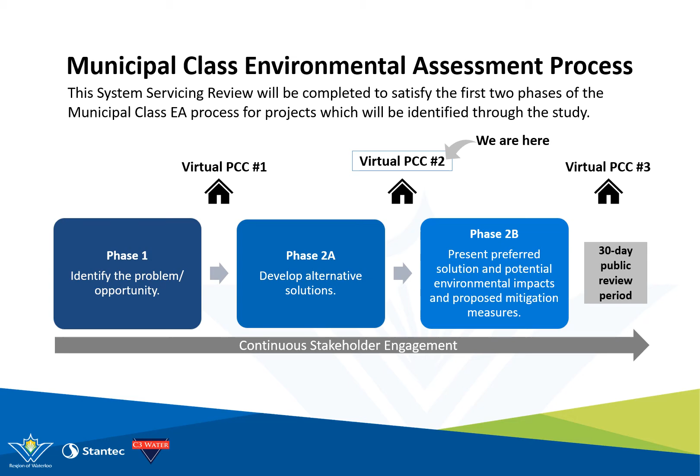We are currently in Phase 2A of the study. Following the confirmation of the preferred solution, after the 3rd Public Consultation Center, and the presentation of potential environmental impacts and proposed mitigation measures, a project file report will be prepared to summarize the decision-making process for the public and stakeholders. A 30-day review period will be provided for the public and stakeholders to review and comment on the report.

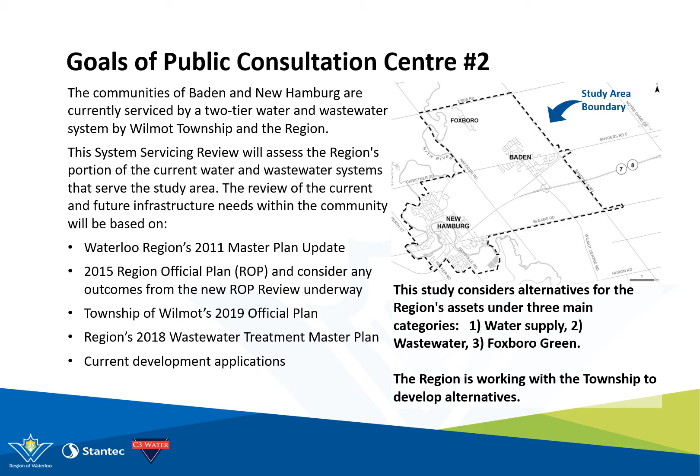The review of the current and future infrastructure needs within the community will be based on the following: the region's 2011 Master Plan Update, the 2015 Regional Official Plan, and considerations for any outcomes from the new Official Plan review currently underway, the Township of Wilmot's 2019 Official Plan, the recommendations from the region's 2018 Wastewater Treatment Master Plan, and current development applications. This study considers alternatives for the region's assets under three main categories: 1. Water supply, 2. Wastewater, and 3. Foxboro Green. The region is working with the township to develop alternatives.

Water storage is sufficient for existing conditions, but under future conditions, additional storage is required of approximately 4,000 cubic meters. As for the community of Foxboro Green, it is currently supplied by a water treatment plant. However, the plant's assets are aging, which demonstrates high operation and maintenance costs.

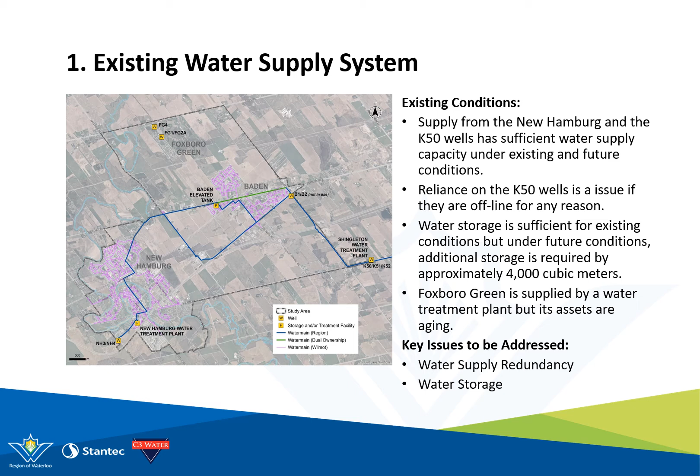Taking these existing conditions into consideration, the intent of this EA with regard to water supply is to address the following key issues: water supply redundancy and water storage. The following alternative solutions have been developed to address the key issues identified for water supply. With regard to water supply redundancy, there are two identified alternatives. Alternative 1, do nothing, and Alternative 2, actuated valve at Shingleton, which allows water to reverse flow under emergency conditions. This alternative is being examined under another study.

With regard to future water storage, there are 5 identified alternatives. Alternative 1, do nothing. Alternative 2, provide increased storage at the New Hamburg water treatment plant. Alternative 3, provide new storage at the Baden well site. Alternative 4, provide new storage at the Shingleton K50 well site. And Alternative 5 is a combination of any of the above.

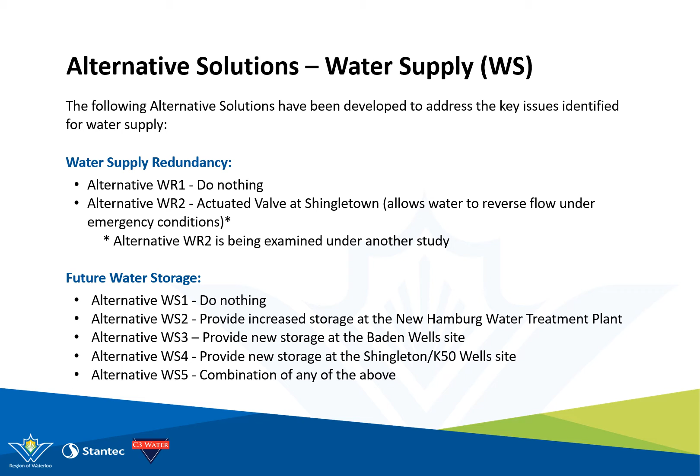The first alternative water storage solution involves doing nothing. This alternative does not include any upgrades and would not meet the overall intent of the study, but is used for comparison purposes.

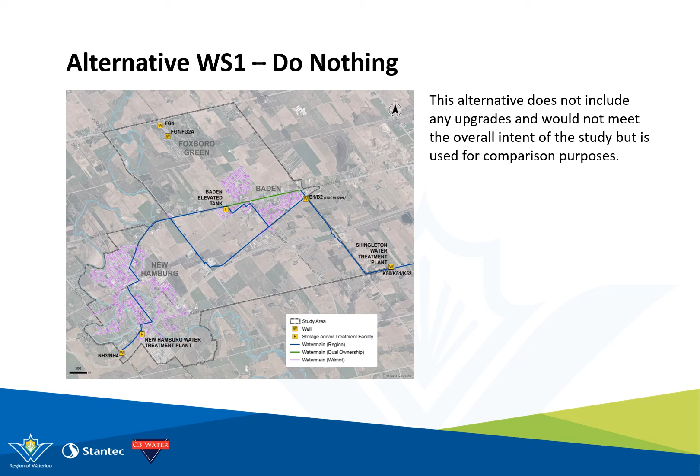The second alternative water storage solution involves increasing the existing underground concrete storage at the New Hamburg water treatment plant. Considerations for this solution are as follows. This increase in storage would help to accommodate future demand peaks. This solution would, however, require increased flow from Baden to allow refill of the New Hamburg water treatment plant reservoir during high demand periods. There are possible site and land limitations related to this solution.

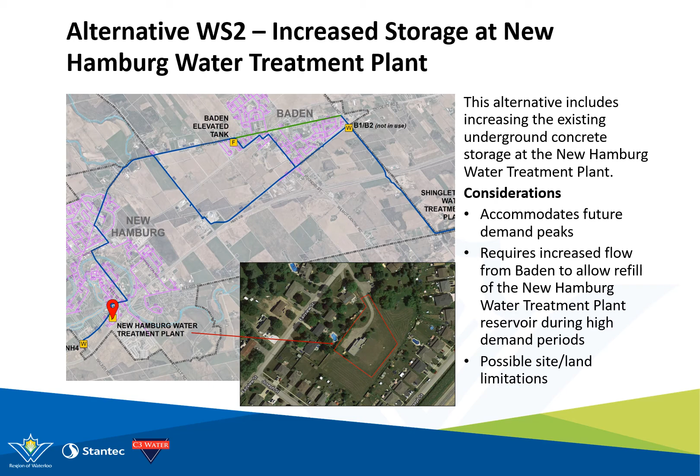The third alternative water storage solution includes creating a new underground concrete reservoir and pump station at the former Baden well site to be fed by the K50 wells. Considerations for this solution are as follows. This option presents an opportunity to reuse the Baden well property. This solution also provides ability to supplement water supply from the Baden elevated tank during periods of high demand. This solution would, however, require repumping of water with a new pumping station and would not be energy efficient. There are also possible land and site limitations related to this solution.

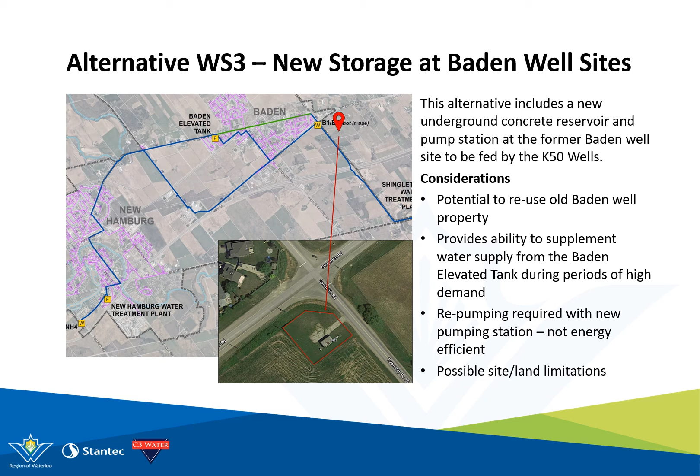The fourth alternative water storage solution includes a new underground concrete reservoir at the Shingleton K50 well site. Considerations for this solution are as follows. This solution would supplement the Baden elevated tank during periods of high demand and allows for possible alignment with future manganese treatment and storage requirements. A new pumping station would be required as part of this solution. There are possible site and land limitations related to this solution, and additional area is required to accommodate the new underground concrete reservoir. This solution does, however, provide potential for linkage with the Mannheim well supply.

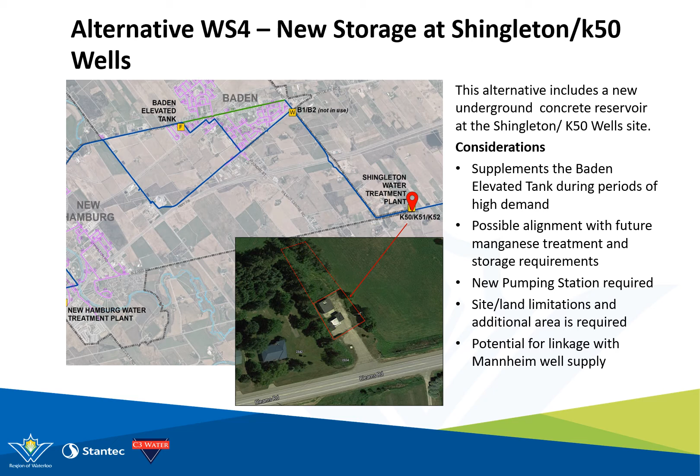The following map provides an overview of the existing wastewater system that serves the communities of Baden, New Hamburg, and Foxboro Green. The region's wastewater infrastructure is shown in blue, purple, and yellow. Existing conditions of the wastewater supply system are as follows. The New Hamburg Wastewater Treatment Plant has sufficient capacity for the study area. The Morningside Pumping Station is also sufficient for existing conditions. As for the Baden Pumping Station and associated force mains, these assets are under capacity for future growth demands within the study area. The Foxboro Wastewater Treatment Plant has sufficient capacity, but requires optimization.

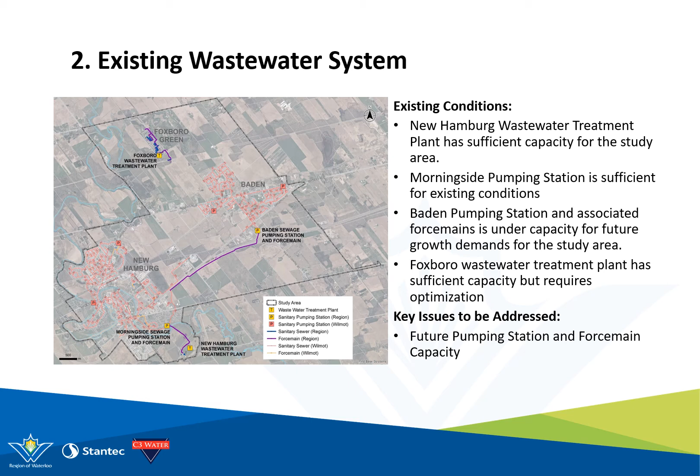Taking these existing conditions into consideration, the intent of this EA is to address the following key issues: future pumping station and force main capacity. The following alternative solutions have been developed to address the key issues identified for wastewater collection. Regarding future pumping station and force main capacity solutions, 4 alternatives have been identified. Alternative 1, do nothing. Alternative 2, upgrade system and maintain existing configuration. Alternative 3, upgrade system and convey directly to the Morningside pump station. Alternative 4, upgrade system and convey directly to the New Hamburg Wastewater Treatment Plant.

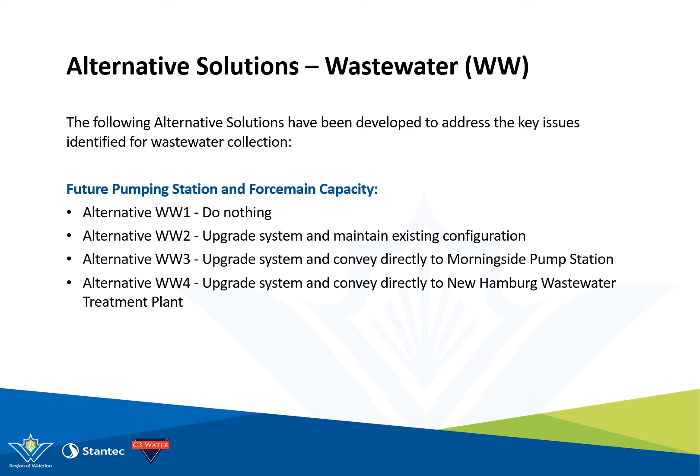The first alternative wastewater solution involves doing nothing. This alternative does not include any upgrades and would not meet the overall intent of the study, but is used for comparison purposes.

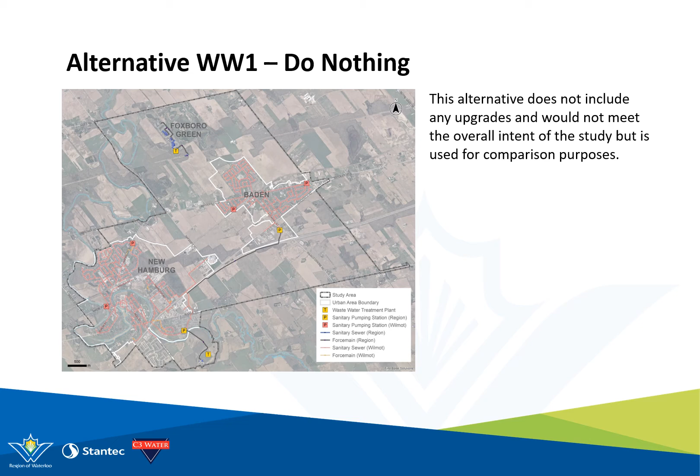The second alternative wastewater solution involves upgrading the system and maintaining the existing configuration. This alternative includes upgrades to the Baden pumping station, a new force main from Baden pumping station connecting to Morningside trunk sewer, upgrades to the Morningside trunk sewer, upgrades to the Morningside pumping station, and upgrades to the force main from the Morningside pumping station to the New Hamburg Wastewater Treatment Plant.

The area for potential force main routing on this slide is shown shaded in yellow. The force mains would be placed in existing road allowance or easement. However, there are multiple potential paths that the force mains could follow. Shown on the slide is just one possible example of the connection.

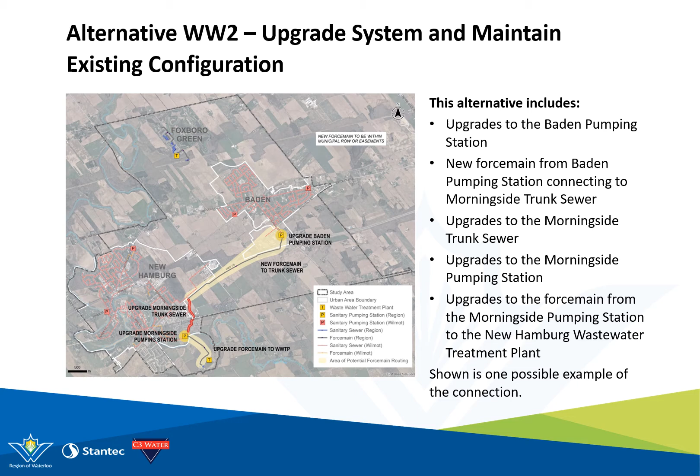The third alternative wastewater solution involves upgrading the system and conveying directly to the Morningside pump station. This alternative includes upgrades to the Baden pumping station, a new force main bypassing the Morningside trunk sewer and connecting directly to the Morningside pumping station, upgrades to the Morningside pumping station, and upgrades to the force main from the Morningside pumping station to the New Hamburg Wastewater Treatment Plant.

The area for potential force main routing is shown shaded in yellow on this slide. Similar to the previous alternative, the force main would be constructed within the yellow shaded area within existing municipal road allowances, right-of-ways, or easements. Shown is just one possible example of the future connection.

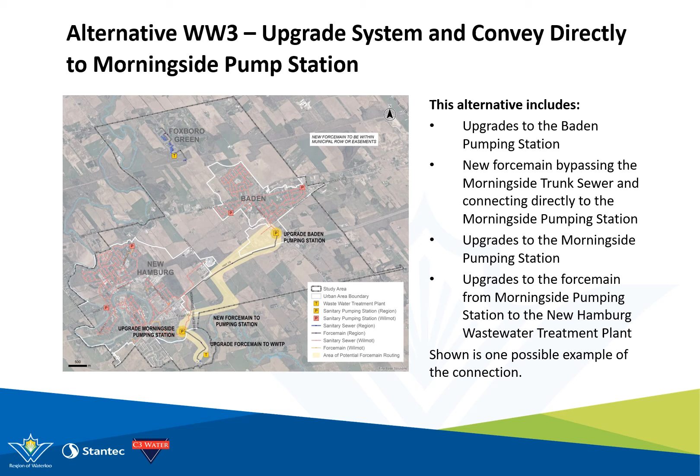The fourth alternative wastewater solution involves upgrading the system and conveying directly to the New Hamburg Wastewater Treatment Plant. This alternative includes upgrades to the Baden pumping station and a new force main bypassing the Morningside pumping station and connecting directly to the New Hamburg Wastewater Treatment Plant.

The area for potential force main routing on this slide is shown shaded in yellow. Similar to previous alternatives, the force main would be constructed within the yellow shaded area within existing municipal road allowances, right-of-ways, or easements. Shown on the slide is just one possible example of the future connection.

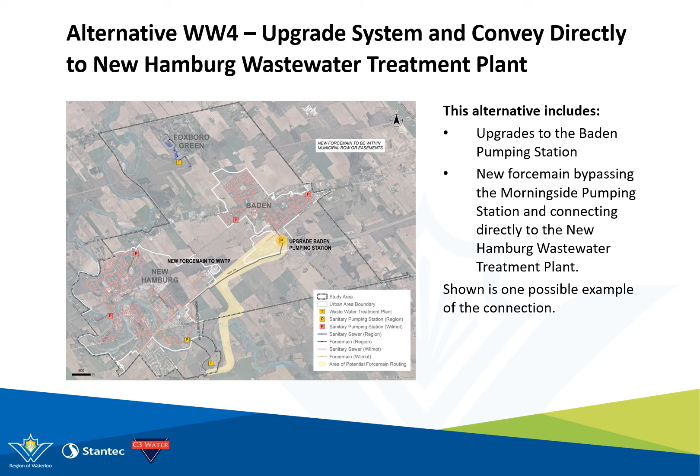The Foxboro Green community is supplied by a system of wells and a treatment plant, while the wastewater services are provided by a wastewater treatment plant. The capacity is adequate, but the region has identified major infrastructure upgrades and replacements in the near future due to asset age and improvement needs. Therefore, now is a good opportunity to review the future servicing for Foxboro Green.

The following alternative solutions have been developed to address the key issues identified for water supply and wastewater servicing needs. Alternative 1, do nothing and carry out necessary upgrades. Alternative 2, provide connection to the existing Baden sewer and water supply system using existing road allowances. Alternative 3, provide connection to the existing Baden sewer and water supply system using a direct route. Alternative 4, provide connection to the existing New Hamburg sewer and water supply system using existing road allowances.

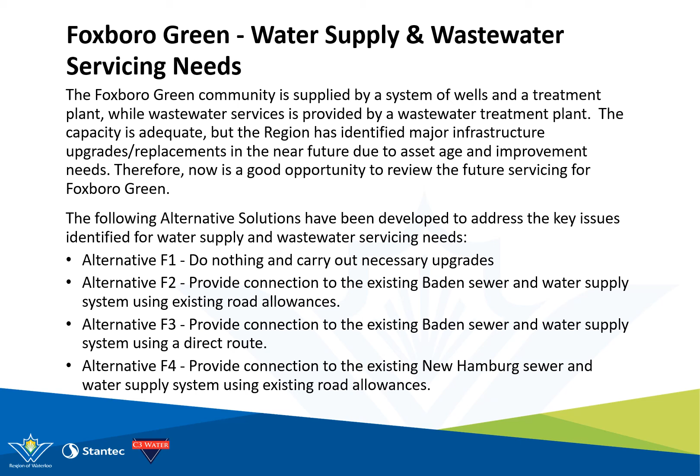The first alternative involves doing nothing. Under this alternative, Foxboro Green would continue to utilize their existing wastewater and water treatment systems. In the immediate future, the region has identified the need for extensive asset upgrades and/or replacements to the supply wells, water treatment plant, as well as optimization improvements to the wastewater treatment plant.

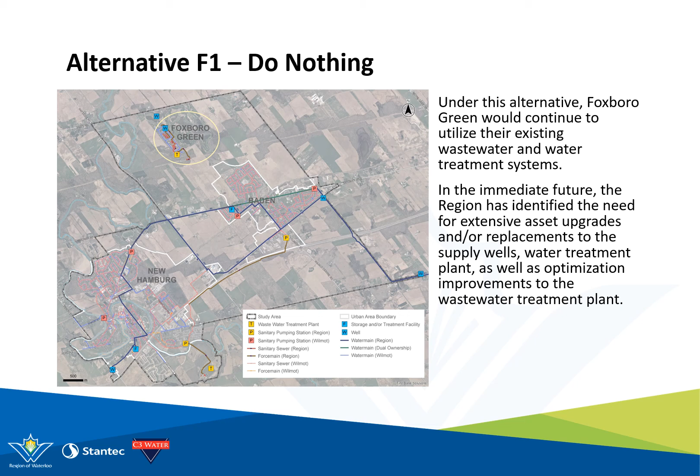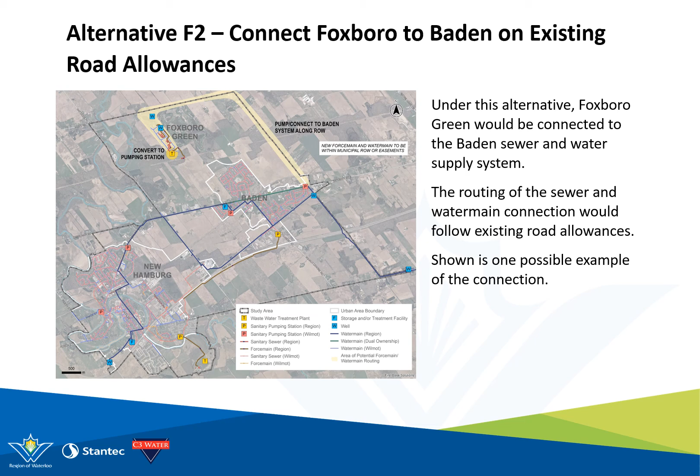Under the second alternative, Foxboro Green would be connected to the Baden sewer and water supply system. The routing of the sewer and water main connections would follow existing road allowances. The area for potential routing is shaded in yellow, and shown is one possible example of the connection.

Under the third alternative, Foxboro Green would be connected to the Baden sewer and water supply system by a more direct route. The routing of the sewer and water main connections could be within the corridors across new development lands under future roads. Alternatively, a separate route using easements is a consideration. The area for potential routing is shaded in yellow. Shown is one possible example of the connection.

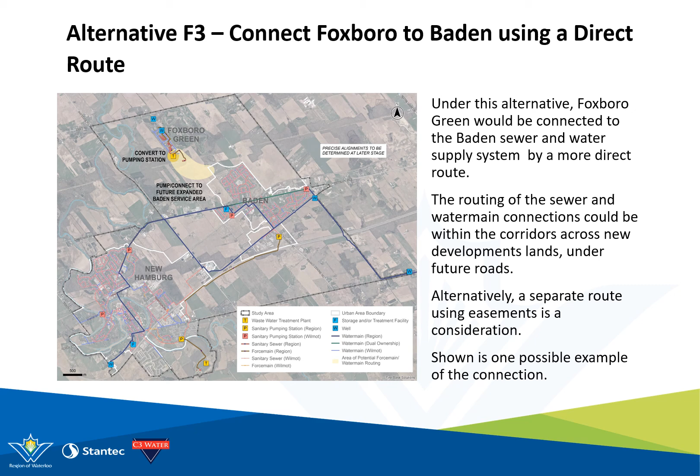Under the fourth alternative, Foxboro Green would be connected to the New Hamburg sewer and water supply system. The routing of the sewer and water main connection would follow existing road allowances. The area for potential routing is shaded in yellow, and shown is one possible example of the future connection.

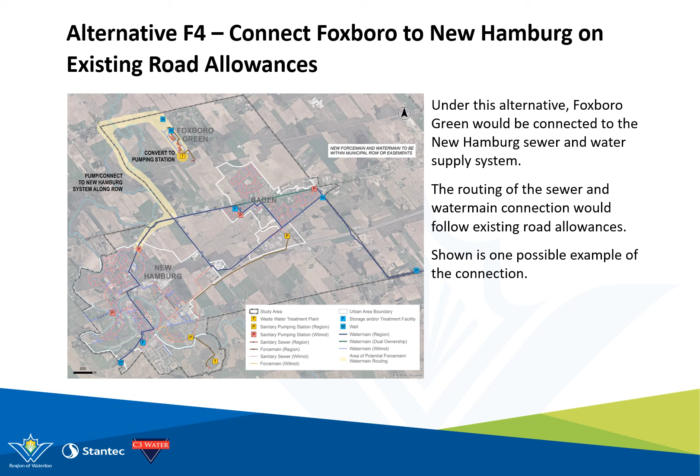Following this PCC, the project team will review input on the information presented. We will continue with our environmental investigations and assessment of alternative solutions for water and wastewater servicing, including potential new facility and force main locations. The project team will identify preferred alternatives and will develop and evaluate the design of the preferred alternatives. This evaluation and the preferred alternatives will be presented at our third PCC for public and stakeholder review and comment.

Feedback received as part of PCC number 3 will be used to prepare the servicing report, otherwise known as the project file report. The report will be published for 30 days to allow for public review before going before Regional Council.